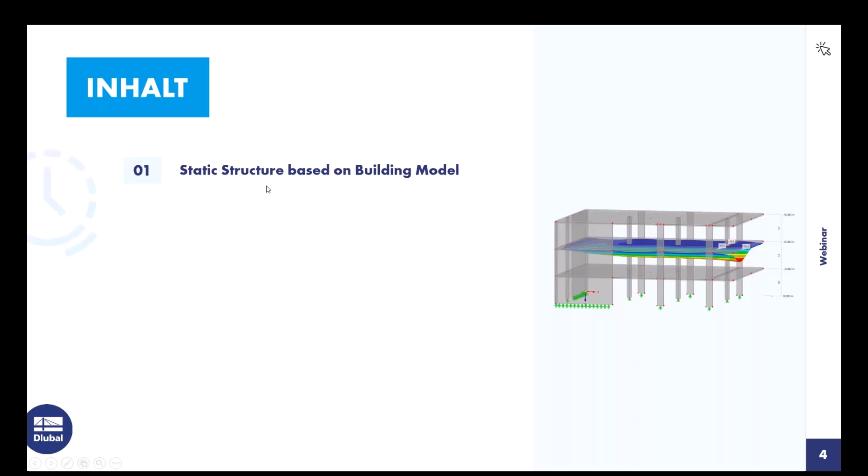You should see my screen now. Yes. So, here's today's content. I will start with the static structure based on the building model.

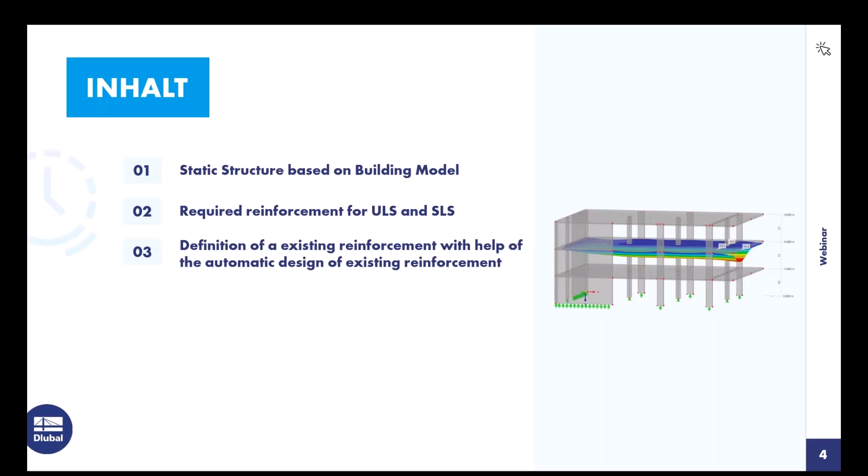So for determining internal forces before the design or before the calculation of the required reinforcement for ultimate limit state and serviceability. Then I will define an existing reinforcement and will adapt this existing reinforcement with the automatic design for the reinforcement. And then I will go to the design checks for ULS, for example punching, and design checks for the serviceability, for example the crack width. And then at the end, I will show the calculation of the deflection in the serviceable state, including creeping and shrinkage. And the last point will be an outlook about upcoming features in the program.

So I will switch to RFEM, to our today's structure. This structure of today's webinar refers a bit to an older RFEM 5 webinar about reinforcing slabs and deflection calculation for slabs. This older webinar was a 2D position. Today I show, or we show, this based on a 3D structure.

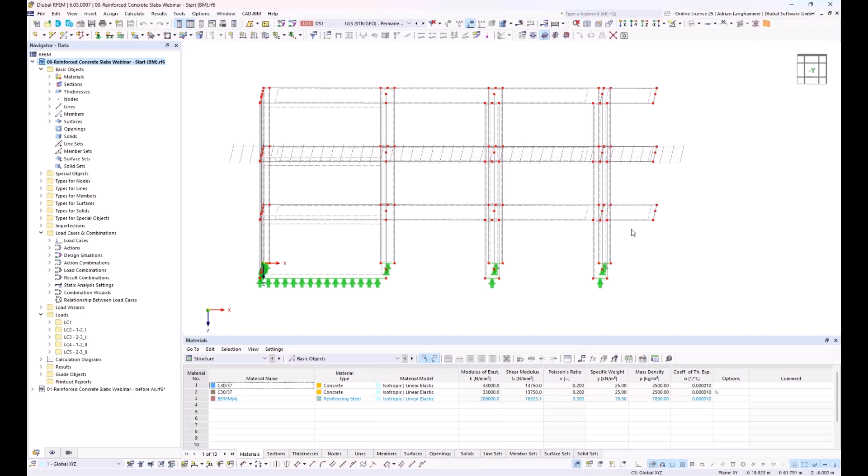This 3D structure has 3 stories. The slabs here in the right area are cantilevered. I have applied some simple but typical loads, a dead load and some live loads here.

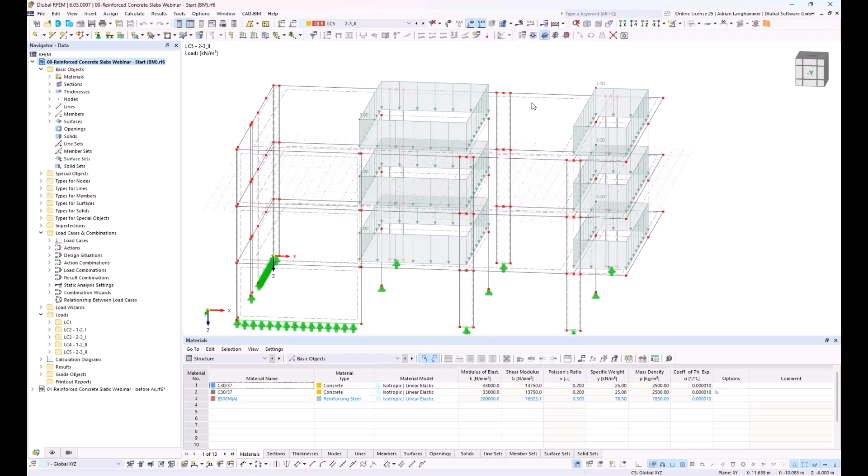In the beginning, I will use the building model add-on to consider the slabs not in the 3D structure, but in some kind of separated 2D structure. Before that, I have to activate the building model add-on. You find it here. And at this point, I will also activate the concrete design, because we will need this add-on afterwards.

With activating the add-ons, the input possibilities in the navigator change. I have here an additional entry called building model. And I will start with the definition for the building model.

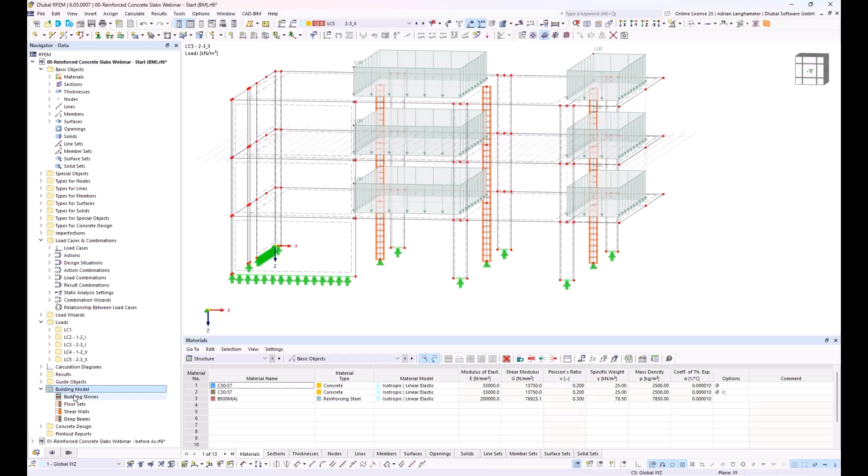So first of all, I have to create building stories. I can do this by hand, or I can use this automatic function where the program automatically recognizes the stories and generates them. This is this button here.

And then I have to choose how I would like to calculate with this building model. There is one option regarding the floor modeling, and there I have to choose rigid diaphragm.

This means that the walls and the columns are connected via rigid diaphragm, and the slabs are considered as some kind of 2D position, or as a 2D structure. It's not exactly a 2D structure, but it behaves like this. For this slab, I have to choose how the attached walls and columns should be considered, so they are considered as nodal supports and line supports. But here there's an option for how this should be done.

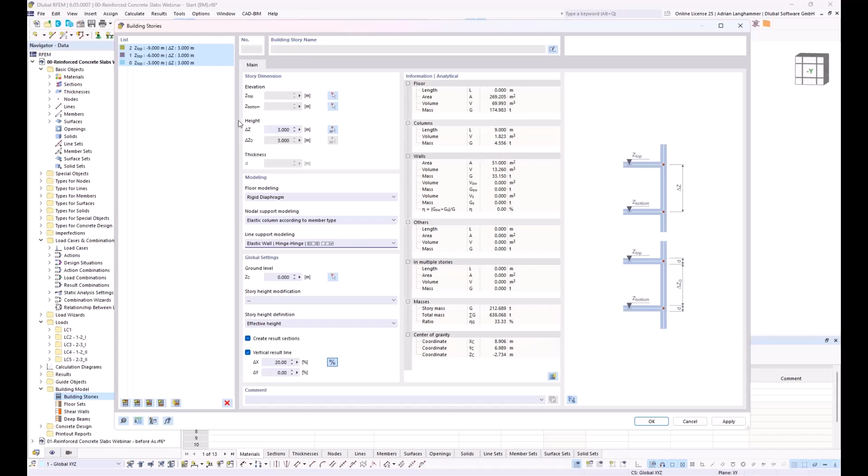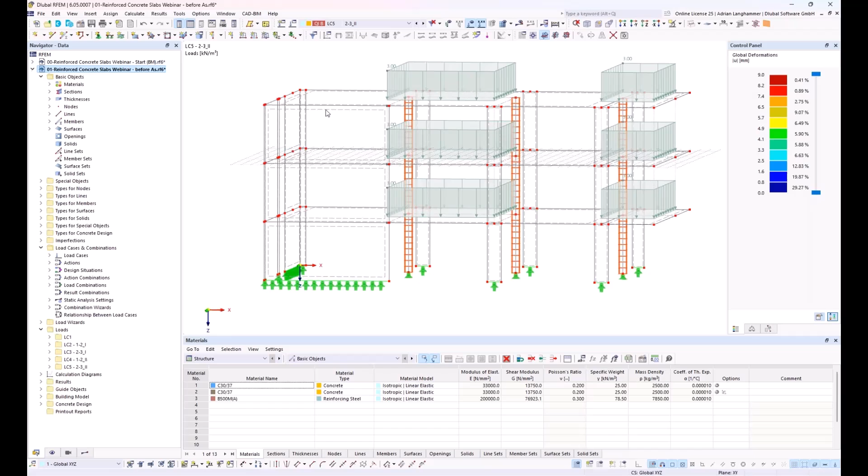So this is my input for the 2D calculation of the slabs. And then I could start to calculate the internal forces. This would need, let's say, half a minute or 1 minute, so I will save this time and switch over to a structure where I've already calculated the internal forces.

And then you get results like, commonly for the statical analysis in RFEM, you get internal forces and deflections. But you have also an option, I can show it, where you could choose what kind of results you want to look at. So there are the common results from the 3D calculation, and there are the results for these separated slabs, which we use for the concrete design.

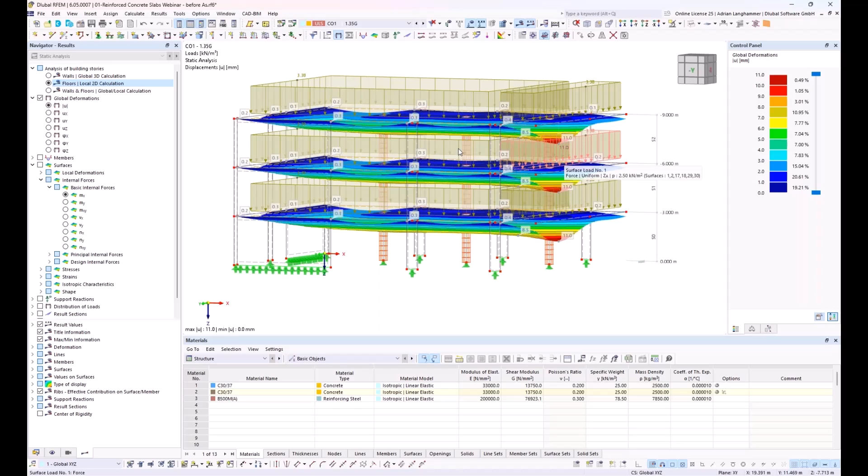I also will show another point. The program, as I mentioned, calculates the walls connected via a rigid diaphragm, and the floors as separate 2D positions, and it also calculates some load transfer based on a submodel which is calculated in the background.

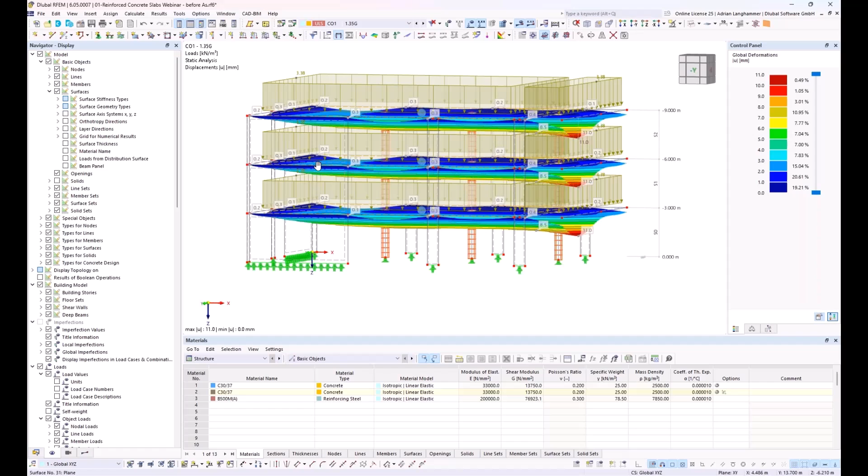And here you could see, if I go to the navigator display and the surfaces, I can have here an option, loads from distribution surface. So now I see the loads as I defined them as surface load, but I can show them also how the program distributes the loads based on the submodel calculation, so I see how this surface load is distributed into the single parts of the structure.

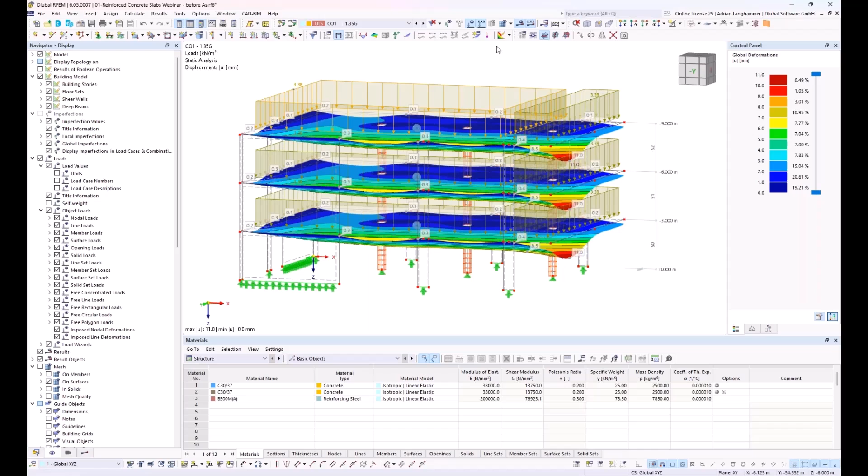So these are our basic results which we use for the concrete design. And now I will start with the concrete design, and in the first step, I would like to calculate the required reinforcement.

I already activated the concrete design add-on. The input for the concrete design you could find in, I would say, 3 main areas. There's an entry here in the navigator, concrete design, and there are, for example, the configurations with all the settings for the design checks, and also there's an entry for types for concrete design with input for the surface reinforcement. And then there's also here in the table this point concrete design, where you could choose which objects you would like to design, and also which loads or design situations you would like to use.

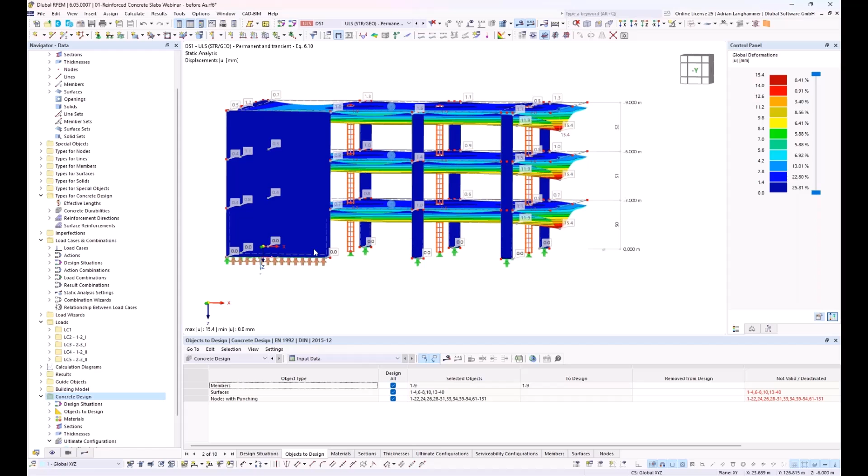So I will start, or I will do the concrete design for this slab in the middle here. So I show only this slab. I will turn off the results and take a look from the top side. In the beginning, I will only design these 2 surfaces, so I will turn off the members and the nodes for punching, and I select here these 2 surfaces. And then I see here that they are at the moment not valid or deactivated, and the reason is that there is some input missing for the surfaces themselves.

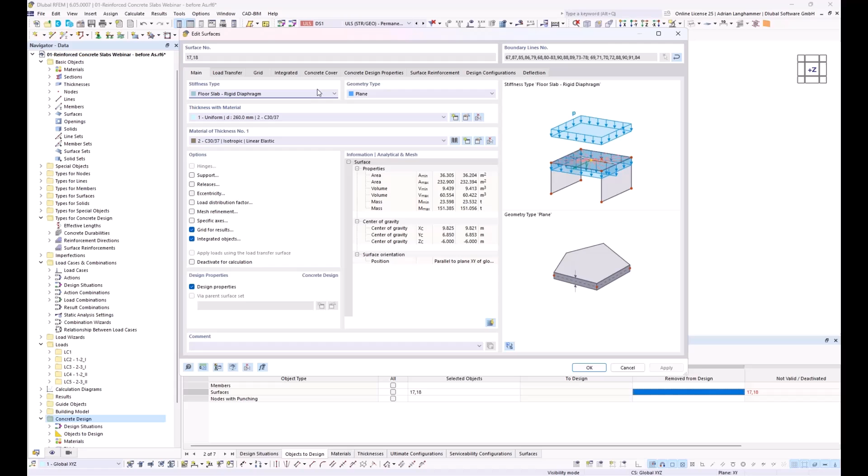So this is the 3rd area for the input. The objects I've selected here for the design, in these objects I have also a concrete related input. So this is here, it begins with the register concrete cover, and then the following registers. So I can do here the input for the concrete cover. I could use it based on the standard automatically, or I could define it user defined. Then I have here the settings regarding reinforcement direction.

By default settings, the first reinforcement direction is always located in the local X direction of the surface. I keep here everything as it is.

And then I go to surface reinforcement, and here I have to do an input. It is necessary to define a surface reinforcement here. It is not necessary to do it absolutely accurate, but the program needs some diameter for the calculation, for example, and it also needs some input for the axis for the reinforcement, because these inputs are influencing the effective depth or the inner lever for the concrete calculation.

So here I start with some basic reinforcement. I define a mesh Q424A at the top and bottom side for these two surfaces, and here I can see what the program then uses as an existing reinforcement. I say OK or apply, both possible.

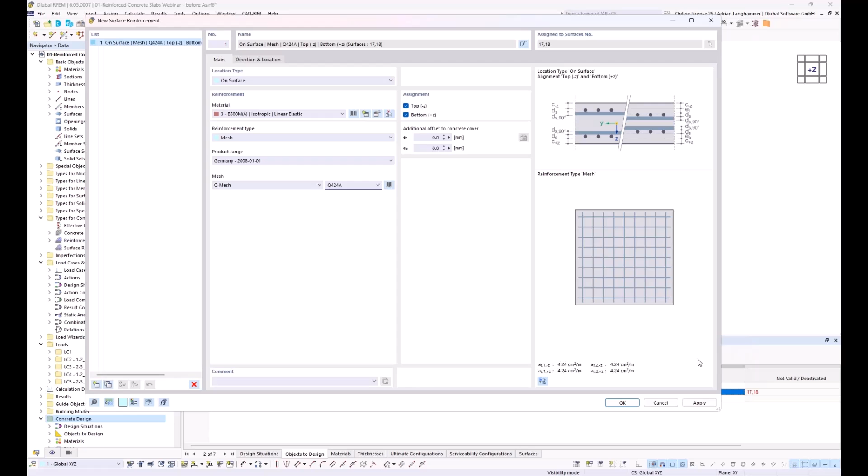In the background, I see that the dialog is a bit delayed, and the surface is switched from not valid to design. So I will close the dialog.

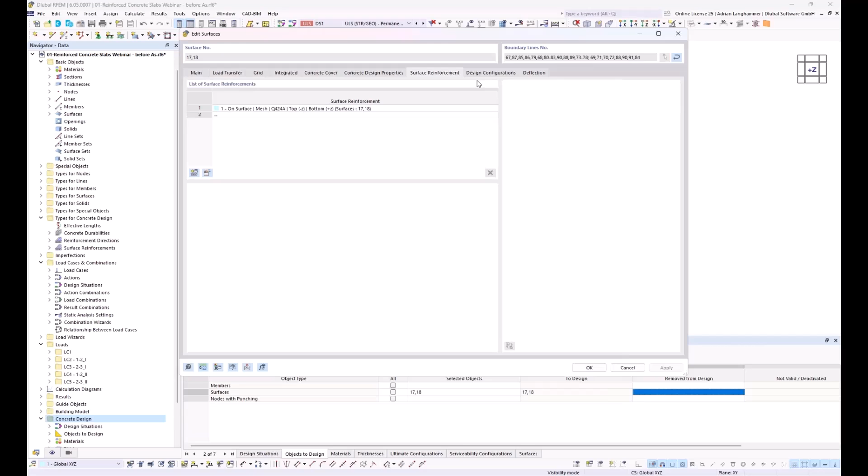Here in the next register, design configurations, I have the related configurations for the design, so the ULS and SLS configuration. Then the last register is about the deflection. This part I will show later.

So I will open the ultimate configuration and the serviceability configuration. First, the ultimate configuration. Here I can do settings regarding the ULS design, for example regarding minimum reinforcement, shear capacity or shear checks, and so on. This is default. These settings are related to slab design, so I keep everything as it is and close it.

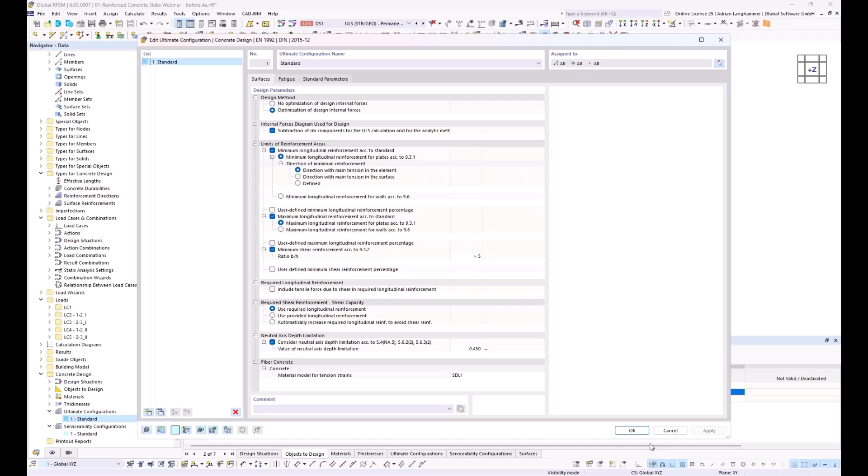Then I will open the serviceability configuration. It's quite similar. I have settings regarding the SLS design checks or for the SLS calculation. Here I would like to turn off the steel stress analysis because it's not necessary in each case.

I also will adapt here the setting for the stress distribution for the effects due to restrain. I will use bending restrain because I know I have here a slab, and the program has some automatism to determine the stress distribution based on the load, but this is not necessary if you know what kind of restrain you would like to consider, and I know that I would like to consider bending restrain here.

And at least I will deactivate the deflection analysis. This is an option I will use later.

Then I have here this option which is activated by default, that the program increases the required reinforcement automatically also for the SLS, and here you have summarized for which design checks this is used. So I keep this option on because this is my first step - I would like to calculate the required reinforcement.

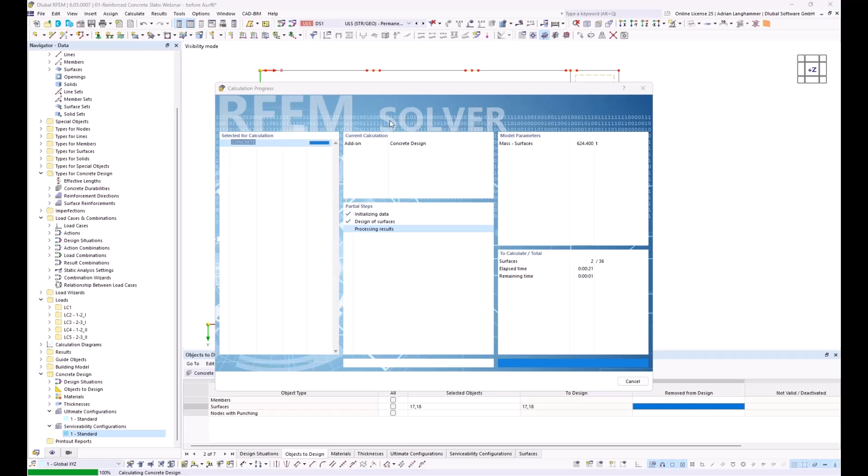And this is one way how you could work with the program. This could be, let's say, a step how you handle your structures by calculating the required reinforcement.

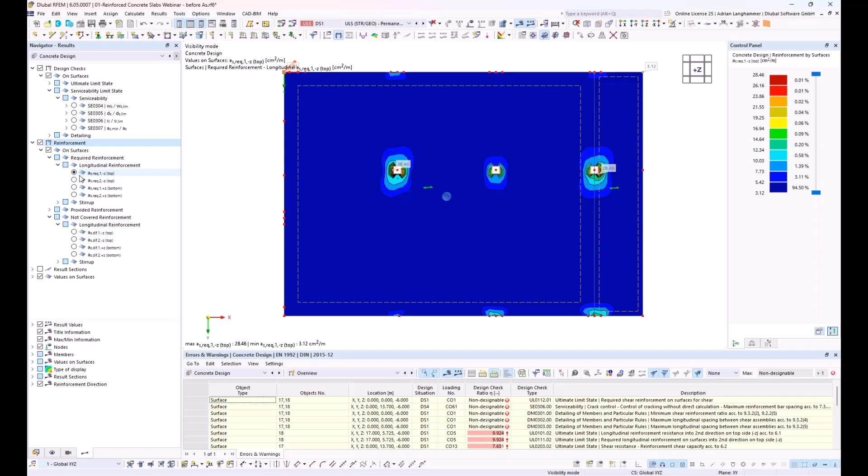When it is calculated, you have here in the result navigator for the concrete design this point, reinforcement, and then you could have a look at the required reinforcement at the top side in the first and second direction, and at the bottom side also in the first and second direction.

At this point, it would be theoretically possible to document the results, and then you have your concrete design. But you could do also a bit more.

A bit more detailed calculation - you could define the existing reinforcement a bit more detailed, especially if you later want to use the deflection calculation.

But first I would switch here from required reinforcement. There's also another option, not covered reinforcement, which shows the difference between the existing reinforcement, which is between the provided reinforcement, which is 4.24 square centimeter, and then I could use here this difference. So I see where this mesh, which I've chosen as basic reinforcement, does not cover the required reinforcement.

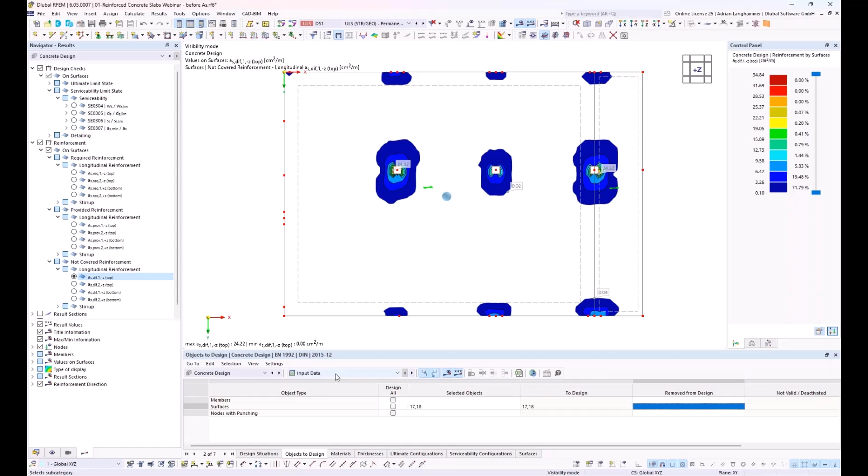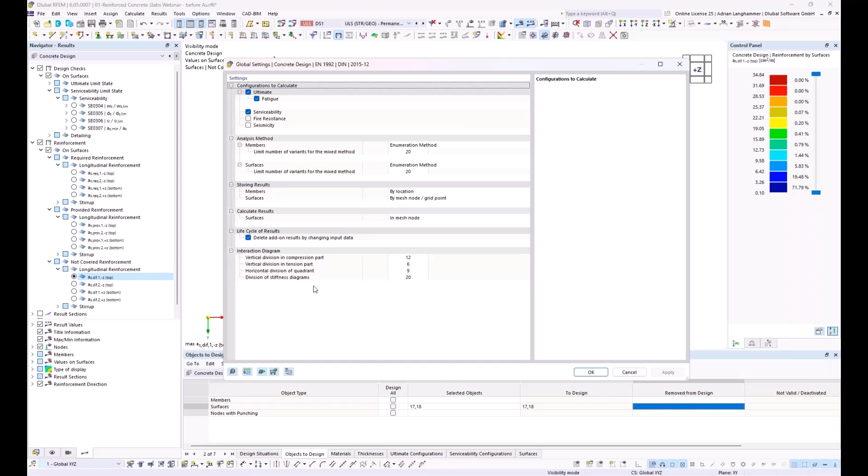But first, I would like to freeze these results because I would like to use them via input. There's an option here in the input data where I could say, if I change something for the input like the reinforcement, the program should not recalculate. It should keep the old results because I could use them via input, and then when the input is done, I could activate this again, and the program recalculates.

So I turn this off, and then I will define the reinforcement, and I will start with the reinforcement above the supports.

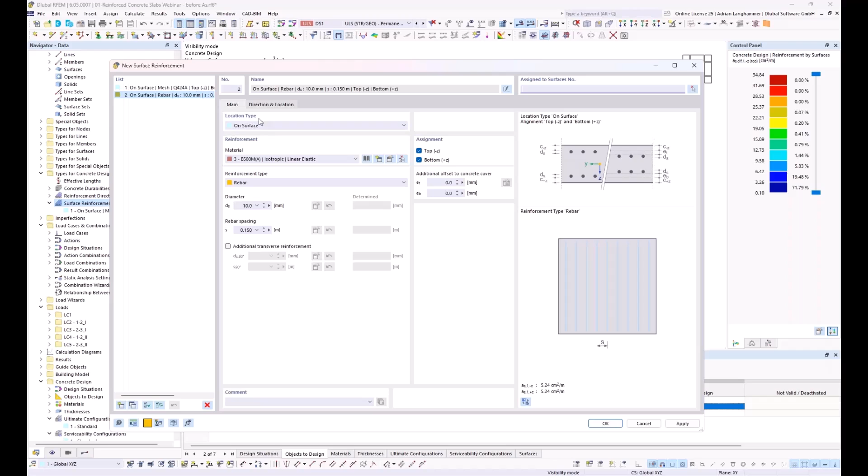I have to go to the navigator, here's surface reinforcement. There's also our existing mesh basic reinforcement. I create a new surface reinforcement, and this time not for the whole surface.

I would like to use a free rectangular reinforcement only at the top side, assigned to these two surfaces, with diameter 20, and also for the transverse reinforcement, diameter 20. And then I would not do the input.

I don't want a direct input of the rebar spacing. I would use the automatic function, the automatic design of the existing reinforcement. If I click auto, the program automatically determines the rebar spacing, so I have to give a minimum and maximum value. I keep the default settings, and for increment I use a larger increment, 5 centimeters, and I do the same for the other direction, and say OK.

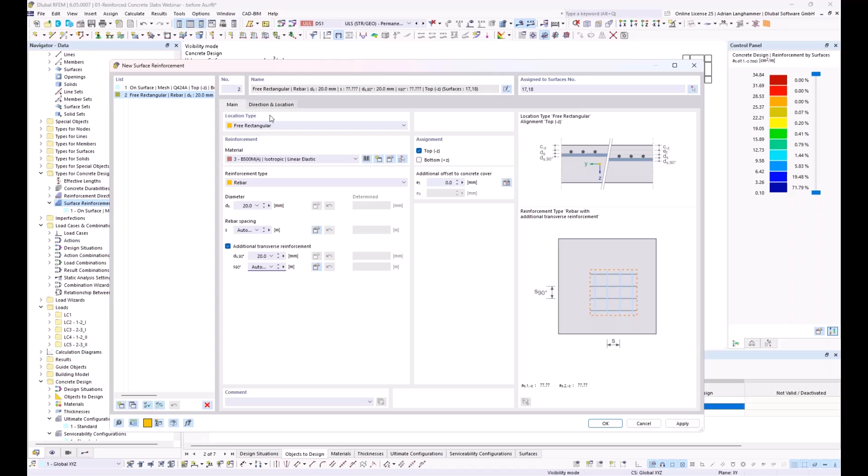So now the program automatically determines the rebar spacing based on the required reinforcement.

I will do the input. I have here the register direction and location. I will do the input based on a center and then side length for A and B. I took a look before about the size of the area, so it's about 2.5 meters. And then I click here on the middle of the support, say apply.

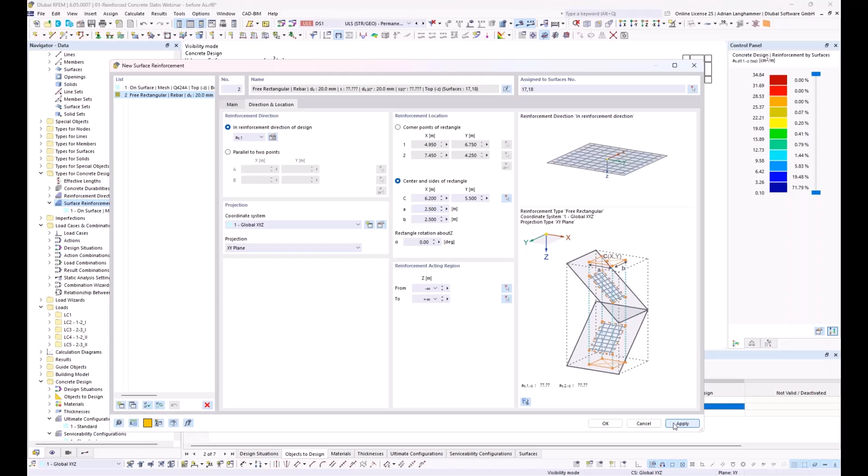And then it should show the reinforcement. I could also, to define the other reinforcement areas, use the copy function. It keeps exactly the same settings, and then I only have to change the location. I can click apply, and again for the other one, apply, and then I have defined the other reinforcement areas very easily.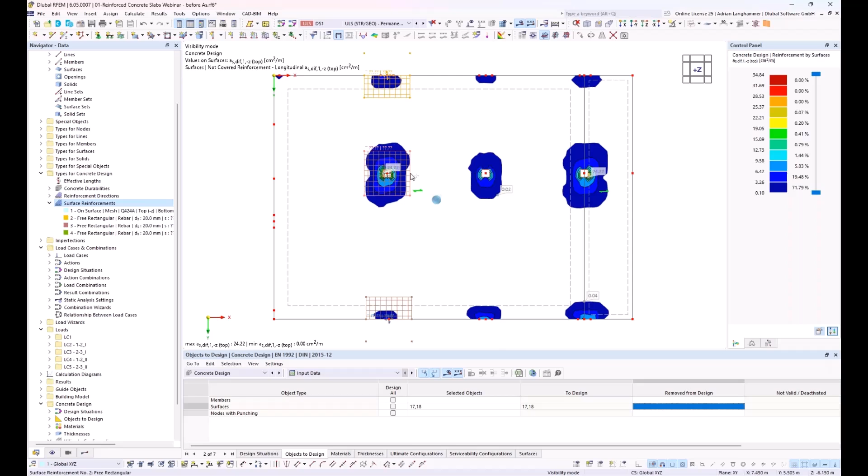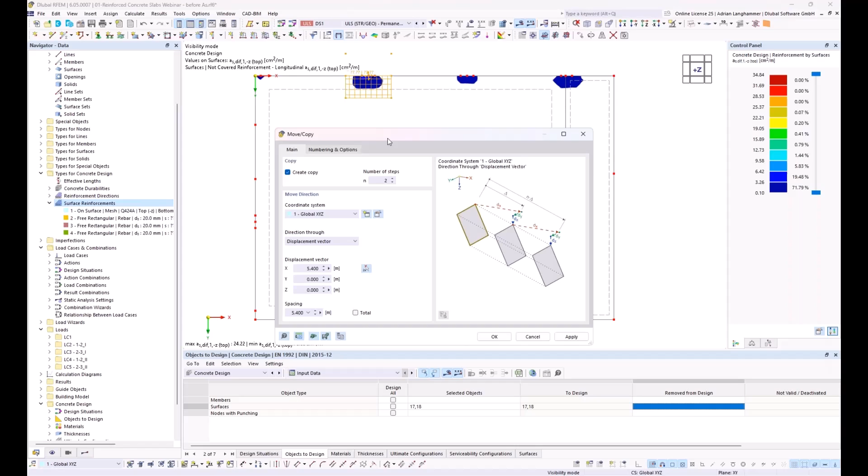There's also an alternative way. The surface reinforcement is like every other object in RFEM, it behaves like a surface or like a free load. I can select the surface reinforcement and use the copy function, say create a copy or create 2 copies, then pick my vector from start to end point and say OK, and the program copies the reinforcement 2 times.

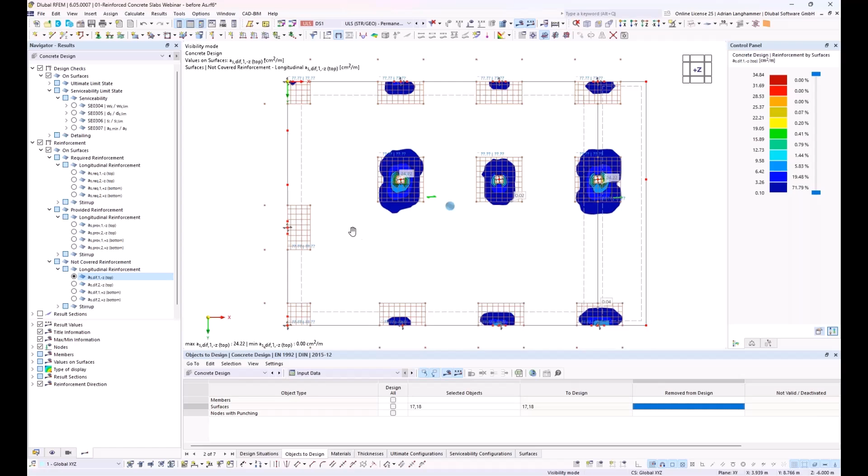I have here in this area also some supports, where there is also some not covered reinforcement in direction 2, and I guess in the upper corner there's also a small area. Here I would also like to use this reinforcement for the support. So I copy it again for this point, this point, and this point, and say OK. Now I have defined reinforcement for all areas where not covered reinforcement is above the support.

I have defined this reinforcement here. It's not necessary to have for each reinforcement area 2 directions. For example, here these 3 upper columns, there is not covered reinforcement in direction 1, but not in direction 2. And also here, there is no required reinforcement in direction 2. I would like to use this and show how you could adapt the reinforcement.

So I could choose these 5 areas of reinforcement, and say I don't want to use the second direction, and say OK. Here it is the same, I forgot this. There's also not a not covered reinforcement in direction 2.

And here for these two, it's vice versa. There is no reinforcement in direction 1, or the not covered reinforcement is 0 in direction 1, but in direction 2 there's some not covered reinforcement. So therefore I could also adapt these two.

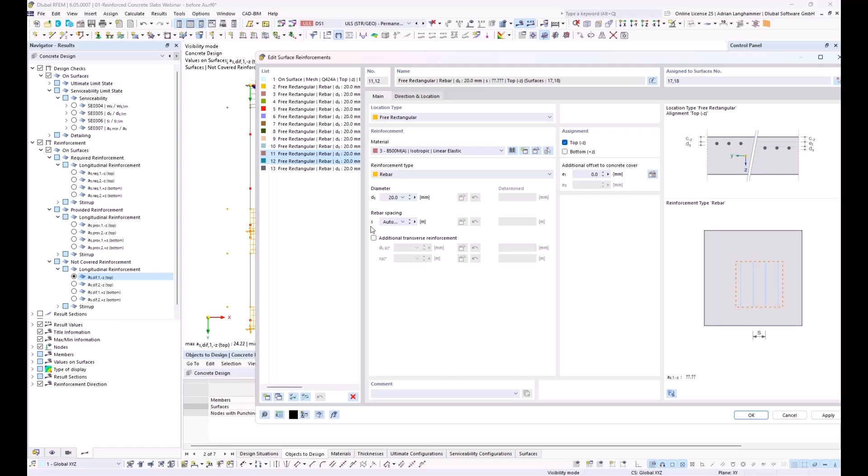It's a little bit different here. I have to switch off also the transverse reinforcement, but I have to say that the first direction is not direction 1, it is direction 2, and say okay. And then I have everything adapted as I would like.

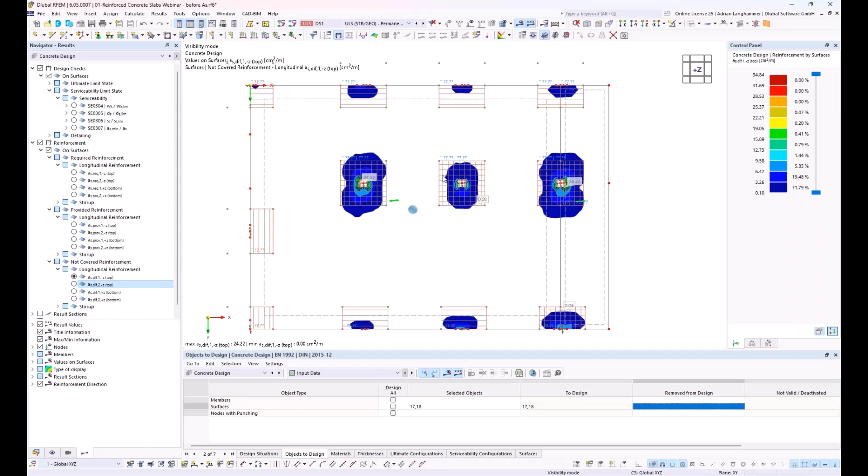There is some reinforcement here in between these supports, so I will create another area at the top side here. I say new surface reinforcement, rectangular, choose these two surfaces, and this time I define the diameter and the distance.

I would like to use diameter 12 at 10 centimeters. Here also for the transverse reinforcement, and I have to check only at the top side.

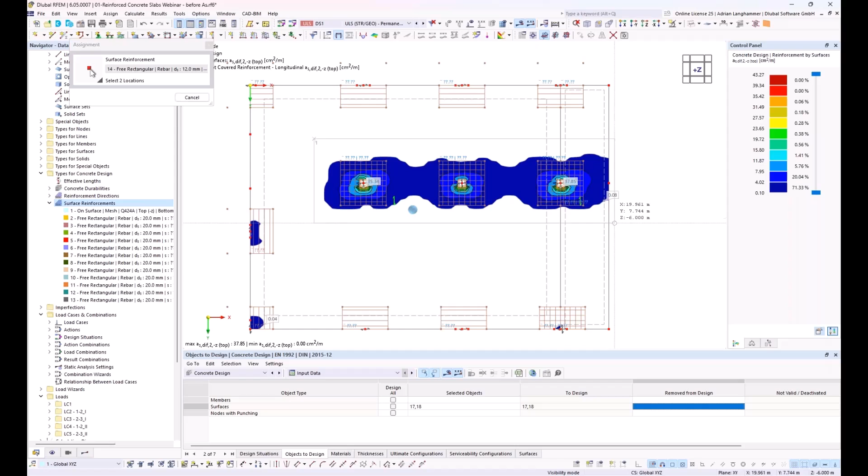And this time I use this definition by corner points. So I have a grid in the background, and I could choose every half a meter. This grid could also be adapted, I use the grid with half a meter, so I can define it here graphically like this, for example, and say okay.

And then I have a, it looks, moment, I did some mistake here. It's always good, you could always use the graphic to check if the input was correct.

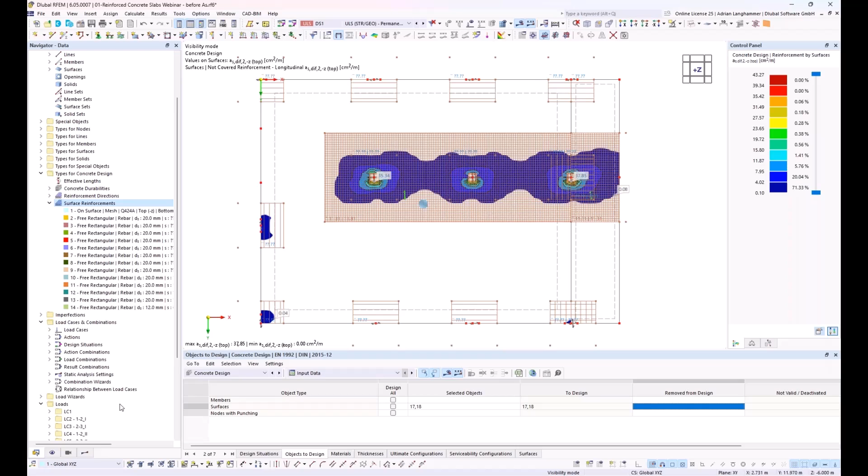And then I have to define also two reinforcement areas for the bottom side. There's an area here where a not covered reinforcement occurs, and then also here in this area in direction 2 mainly, also a small reinforcement in direction 1. So I define for these areas also an existing reinforcement.

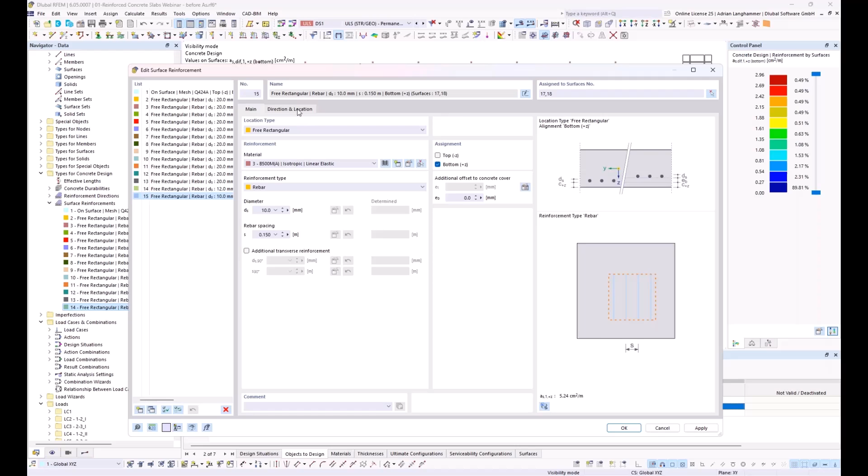I use the copy function again and copy my last reinforcement and switch to bottom. And then for the first one, I would like to use diameter 10 every 15 centimeter. And in this area, let's say from here to here, and say apply. I could check it, yeah.

And then another area, or another reinforcement at the bottom side here. In first direction, I would use 10 at 30 centimeter, and in the second 10 at 10 centimeter, like this. And I use it for this whole area here, and say okay. And then I'm ready with my input.

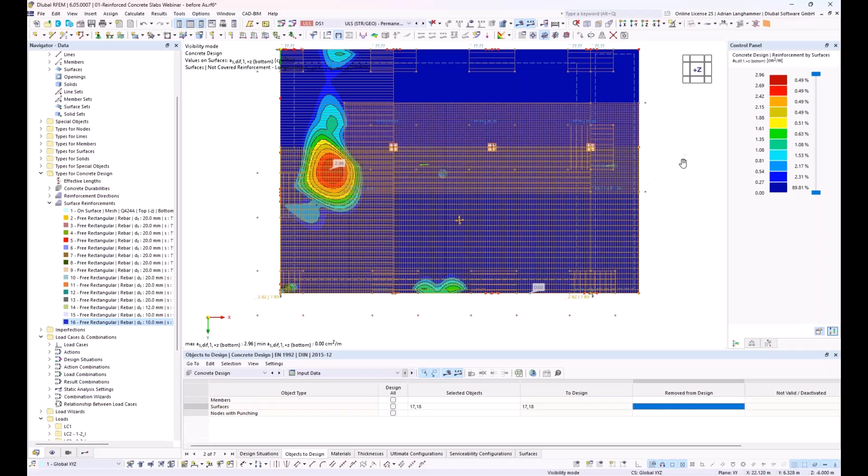So I could now start the calculation again, and with starting the calculation, the program will automatically adapt the reinforcement. So I go to the input data again, and I switch off this option. Say okay, the results are deleted. I could calculate again, and now I see that there's changed a little bit for the calculation. I have now two concrete entries.

The first calculation is the required reinforcement. So with changing the reinforcement, there could be also changes regarding the inner lever arm or the effective depth, depending on the defined reinforcement. And the second calculation is the automatic design of the existing reinforcement.

So in this step, the program automatically decreases the rebar distance till this point that the required reinforcement is covered. There could be also the case that there is no solution, but then you should see the minimum distance. So in such case, you maybe have to adapt then the diameter, for example.

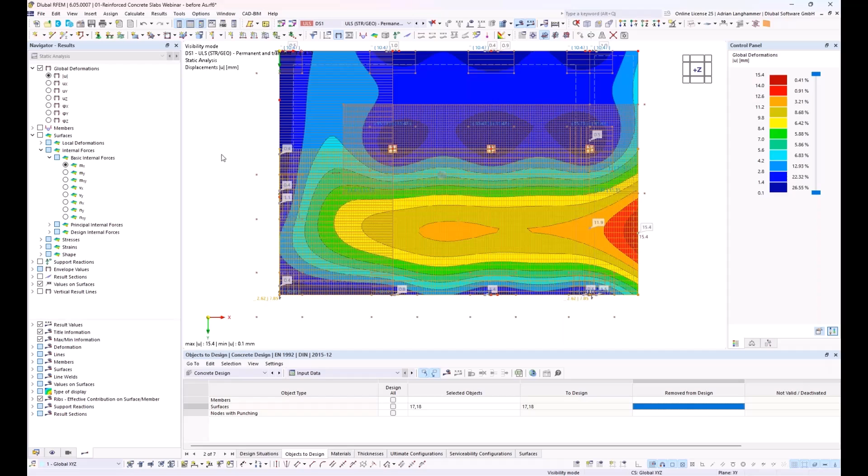So now the calculation is done, and I could have a look at the results. So maybe I start with the top side with the not covered reinforcement. So now the not covered reinforcement is 0, and also in the second direction is 0. So in these areas where I used this automatic reinforcement,

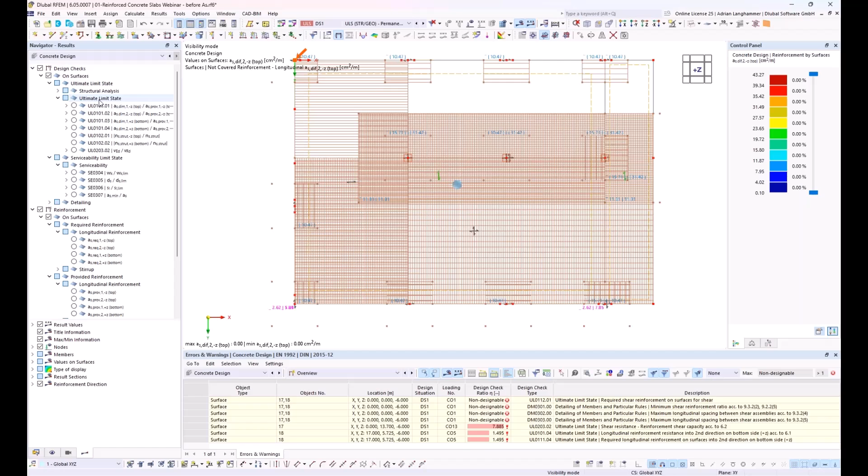everything is covered. I could also have a look now at the design checks, for example, at the ultimate limit state for the top side. Maybe I can— does not look that good. If I have this reinforcement turned on, I can switch it off here if I switch off types for concrete design.

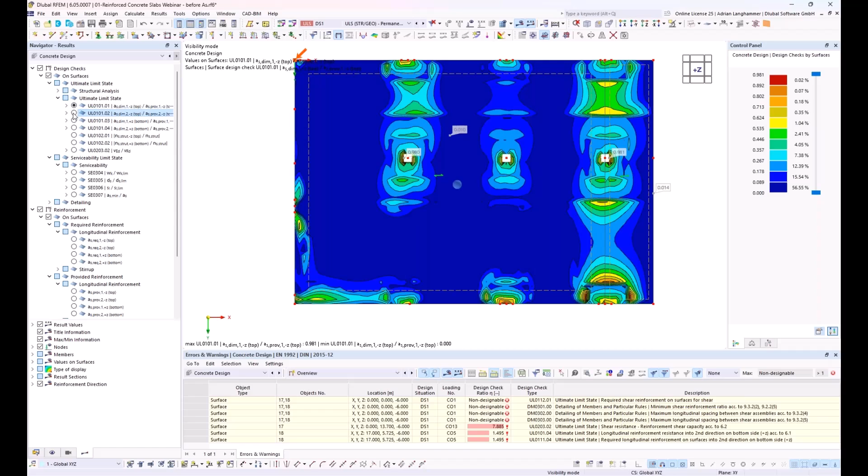So I see here the design check for the ULS. Everything is below 1, so everything is fulfilled at the top side here, both directions.

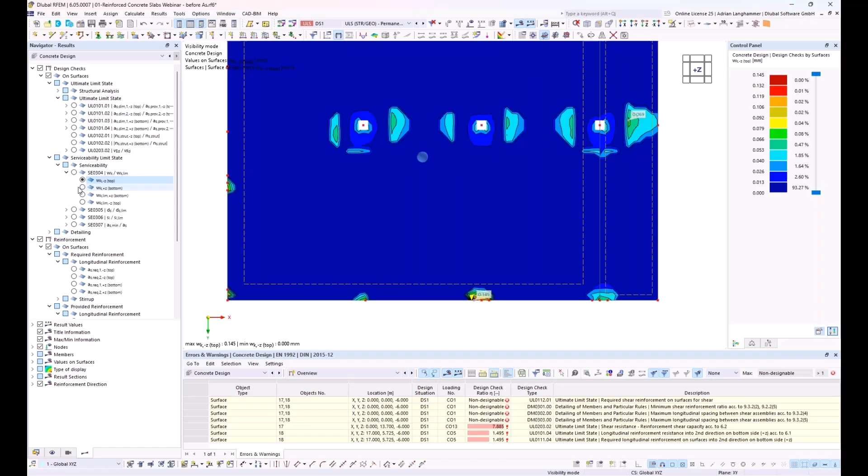I could also have a look at the serviceability, at the crack width design check, for example. I could here have a look at the ratio. The ratio is smaller than 1. For the top and bottom side, I could have a look directly at the crack width. So here I see the crack width value in millimeter here. At the top side, the resulting crack width, and also at the bottom side.

So this should show the possibilities I have here with this automatic reinforcement. And if I say okay, the program determined this distance, I can see it here, the value which was calculated. The program calculated this value, and I would like to use it as an input now. From now on, I could select all these.

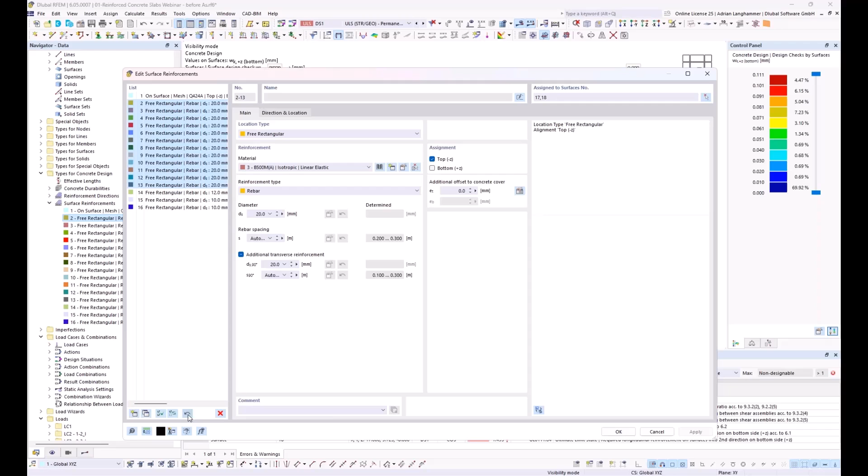I could do it for each reinforcement separately by clicking these arrows, but I could also select all these reinforcement areas where I use this automatic function, and say with this function it should use the determined value for the rebar spacing in the input, and then I could say okay. And from now on, it does not need to recalculate the automatic function in the next calculation or for following calculations.

So this is ready. The definition of the existing reinforcement is ready. Now, as a last step, I would like to do the deflection calculation and also the punching design.

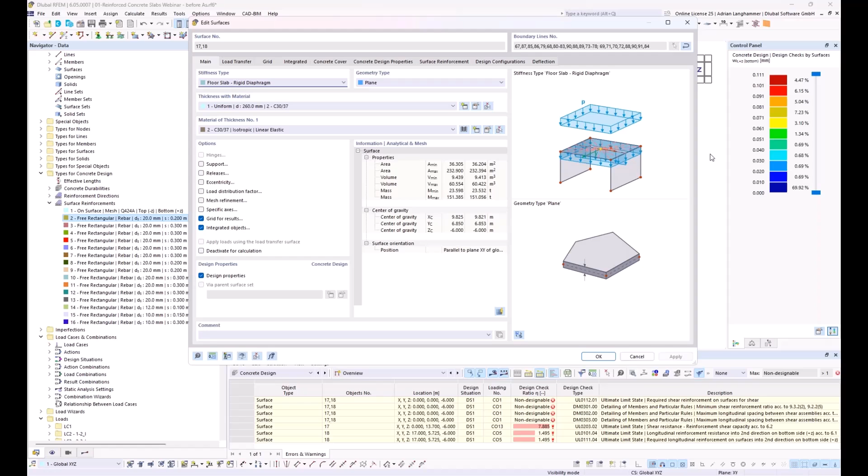I will check at the beginning the input for the deflection calculation. There's—I have to do it separately, one moment. There's an input here for this surface. Regarding the deflection, I could here select the surface type.

This surface is double supported, and I have here a reference length of 8.2 meter, which is the distance between the corner here at the edge and here the column here at the edge and the column here in the middle.

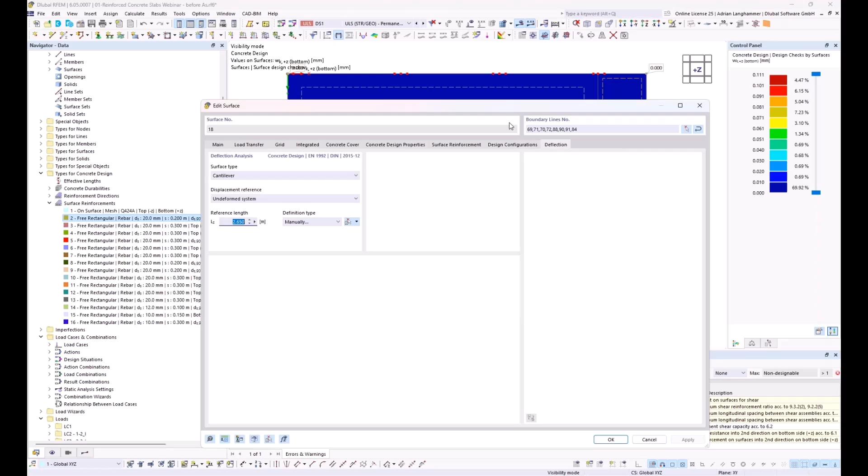And then I have this value also for this canter, for this balcony here, for this cantilevered area, and then I have surface type cantilever and reference length 2.65, which is the distance here.

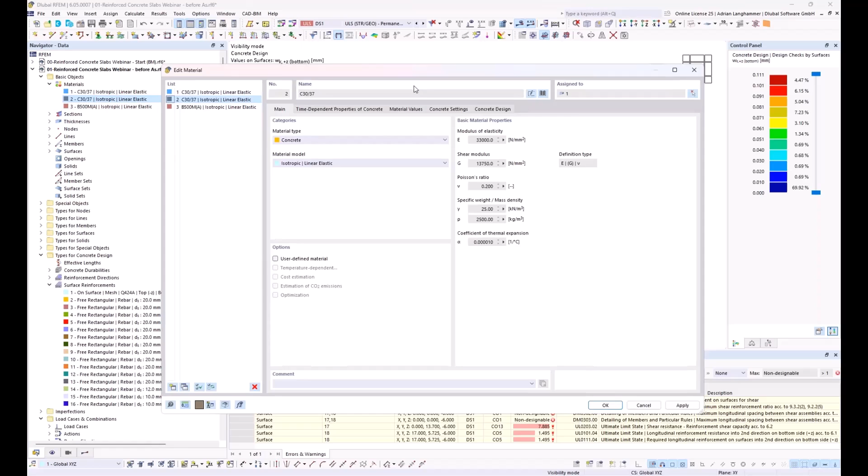I also have to activate or check if the creeping and shrinkage is activated. This is a setting or an option which I find in the material, it's a material related property. So if I open the material here, I have an additional register, time-dependent properties of concrete.

And here I could activate creep and shrinkage, which is used then for the deflection calculation. Here I also see the input for the creeping and shrinkage. This is regarding the calculation I showed today. This creep coefficient diagram is for visualization, based on one thickness.

So creeping and shrinkage is activated. The reference length for the limit value for the deflection is defined, and then I could check the serviceability configuration.

I can now activate the limitation of deflection or the deflection analysis. Here I see the different limit values based on the type of the support of the surface, or if it is a cantilever or if it is both side supported surface.

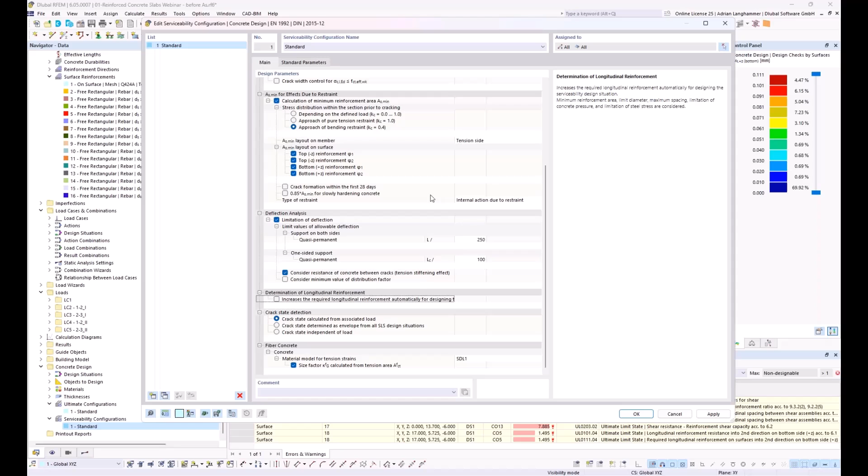It uses different limit values, and then I will in this step also deactivate the determination of the longitudinal reinforcement, again because we have now defined our existing reinforcement. I don't have to use this calculation again, so this saves a little bit calculation time.

And I say okay. Of course, the results have to be deleted, but before I recalculate, I also would like to activate some nodes for the punching. So here, let's say these 3 nodes or 3 points at the columns should be used for punching.

Punching design is also like surface design. You have the object with the input, which is for punching the node. If I click on the node, here you find that punching design is performed, and then you have a related ultimate configuration. I can have a look again at the ultimate configuration.

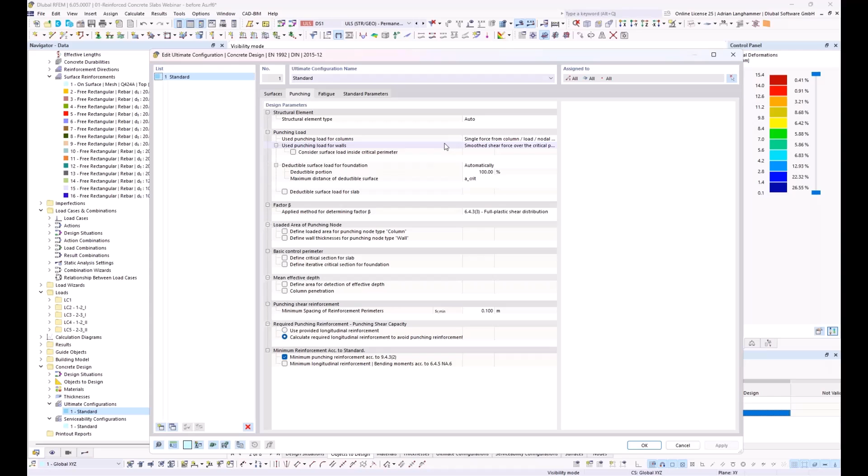And with selecting some nodes for the design here, I get this additional register for punching, and here you could find every single option for the design, or how this punching load should be determined. There are a lot of different settings.

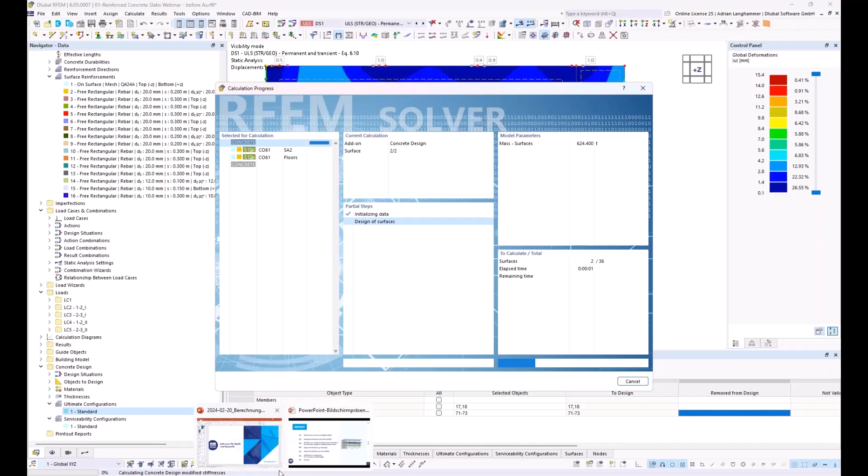I would keep everything as it is here. I would like to use the default settings, and then I recalculate again. But I use this calculation time and switch back, and will do a short explanation regarding the deflection calculation we use here for our concrete design.

This is the deflection calculation according to Eurocode 2, chapter 7.4.3, and this is based on a distribution coefficient zeta. And here's explained how the calculation would work without tension stiffening.

This would mean the deflection is based on the consideration of a cracked state. So the program calculates a stiffness for uncracked state, which is this function here, and cracked state. So we have a stiffness for uncracked state and a stiffness for cracked, or let's say fully cracked state here. And depending on if the element cracks or not, it uses the value for the uncracked or cracked stiffness.

The stiffness itself depends on different parameters like existing reinforcement. This is also the reason why I did some more accurate input for the existing reinforcement. It depends also on the plate thickness, also on the height of the compression zone, material parameter, and of course also creeping and shrinkage.

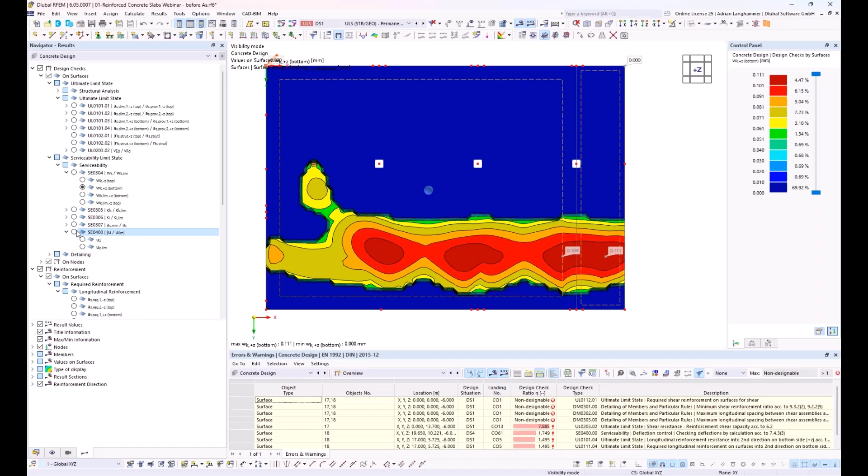So now the calculation is finished, and I have here for the design checks, an additional entry for the deflection calculation. So I could have a look at the ratio. Then I see the ratio for the deflection calculation, but I could also have a look at the deflection value itself.

And here it says I have 4.6 centimeter deflection here, which would mean that the deflection would be not okay for this situation. It would be a bit too large. So there are different ways how to handle it.

One possibility would be to increase the thickness of the slab. Maybe there's also an option to reduce some weight in this area. Of course, the longitudinal reinforcement could also be increased, or I would consider a hock for the formwork here.

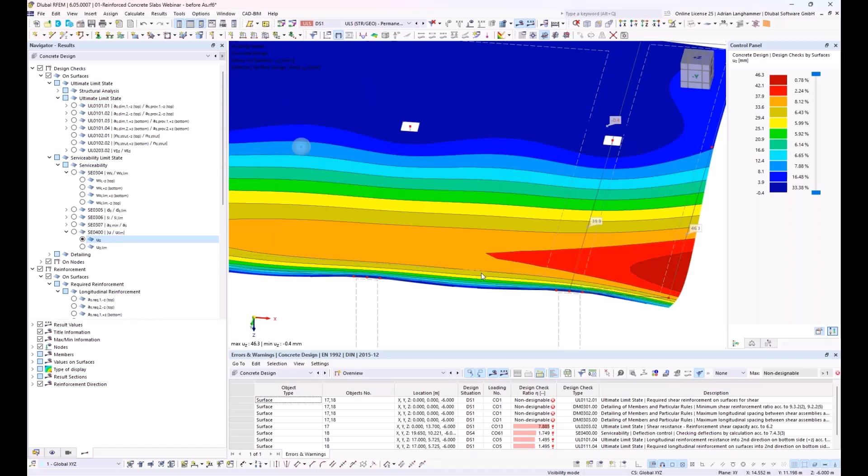I also could have a look and compare the deflection a bit. Here I have the deflection for the concrete design. I could also look again at the uncracked state value for the deflection. If I switch back to statical analysis, quasi-permanent load, here I have the 9 millimeter, and compared to that I have the 46 millimeter, which is from the factor.

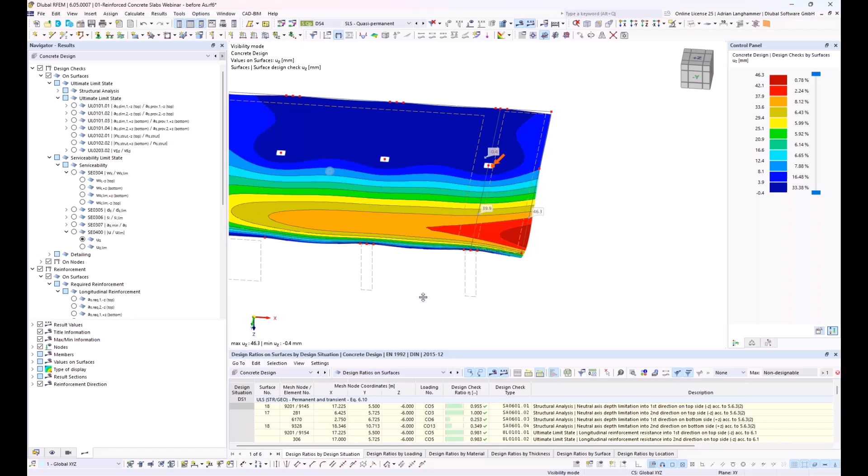It seems plausible. I could also take a closer look at the deflection results in the design check. So if I take a look at this point at the deflection calculation, I can see the detailed calculation with all the intermediate values. So the whole program is not a black box - you see every calculation step here.

Also for the deflection calculation, I could look at the calculation in uncracked state, in cracked state, all the stiffness values. If you would like a closer look, showing these design check details is possible for all design checks calculated in the program - not only for deflection, but also for crack width, the ULS calculation, the punching design, and so on.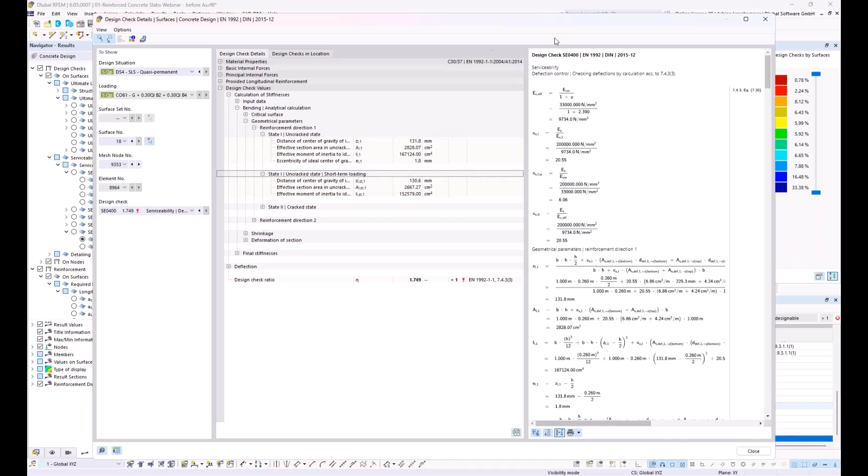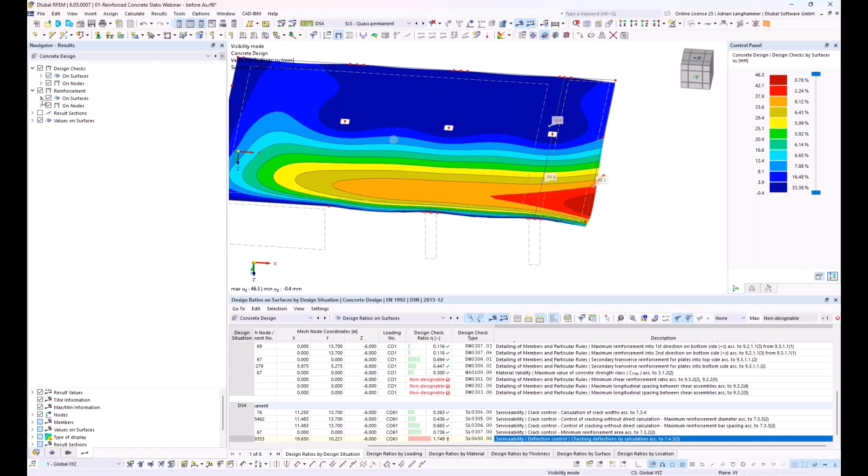In the last point, I would like to have a look at the punching design. So if I use the punching design here, I have results on nodes where I could, for example, look at the required reinforcement for a node, like here, required reinforcement at the top side. The program with default settings always tries to increase the longitudinal reinforcement to cover the punching, but I could also use the existing longitudinal reinforcement, and if that is not enough, the program will calculate the required reinforcement for punching.

Maybe to show a small look into the future and the upcoming features - one next step which will be released in the program will be punching reinforcement. I have prepared a small example of how it will look in the future. So if I have here, for example, a required reinforcement at one point...

I could take a look at the required reinforcement at this node, and then I see how much reinforcement is required at which distance. I could also look at the details and, for example, see how many link legs I would need. So here, for example, it is 11, so to cover it I probably need 12.

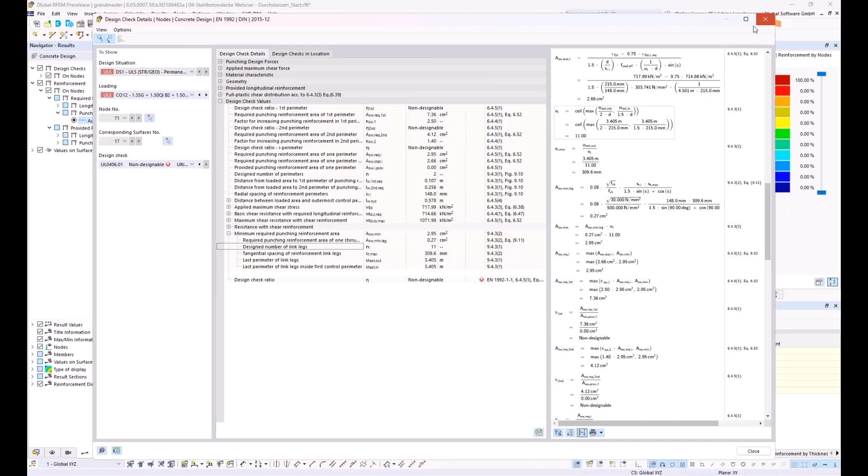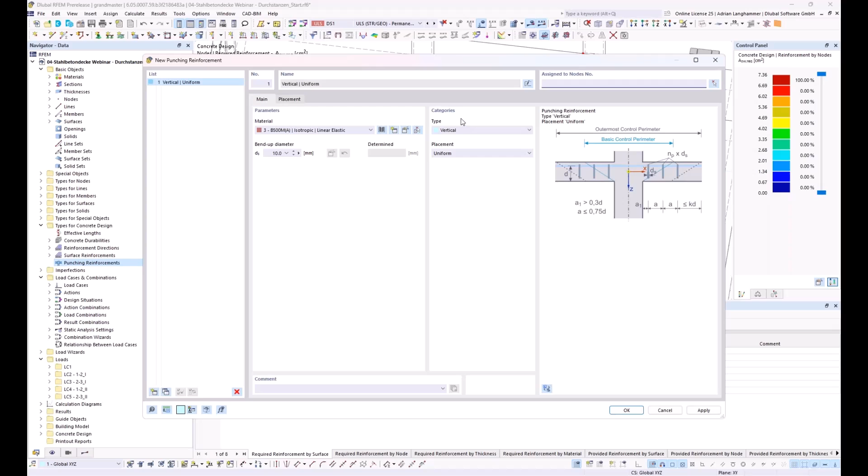And then I could define a punching reinforcement. So here, this is in the types for concrete design. There will be an additional point in the future, in the upcoming versions, for punching reinforcement, and I could create a new punching reinforcement. I keep everything as it is, but I have to choose the node where the punching reinforcement should be applied, then use the number of perimeters and number of legs in each perimeter. You see here that there will also be an automatic function in the future.

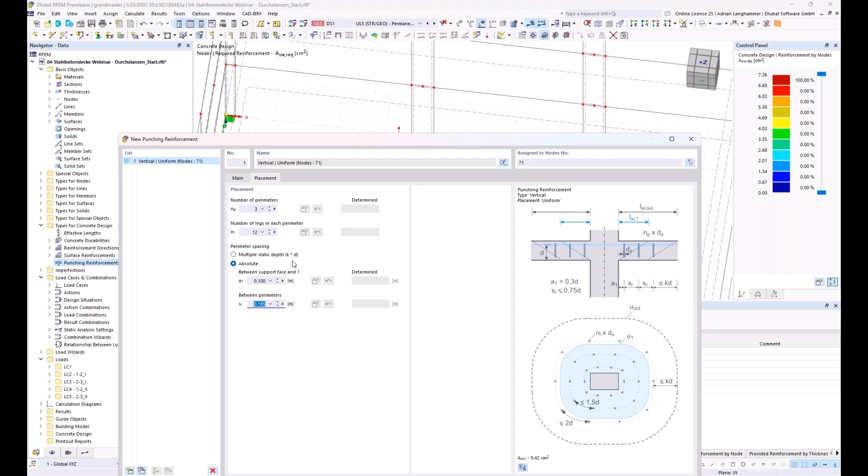Now for this example, I will do it manually. So number of perimeters, let's say 3, and number of legs in the perimeter, 12. Then the distance between the support face and 1 should be smaller than 0.107, so I would say 0.1 should work. And then the difference to the next is something about 11 centimeters.

And then I say okay, of course it needs to recalculate, and then I see the reinforcement here. I could recalculate the results, and now I see that the design ratio is fulfilled - so everything works here for the punching design with this defined punching reinforcement. Yeah, this should just be a small look into the future at the end.

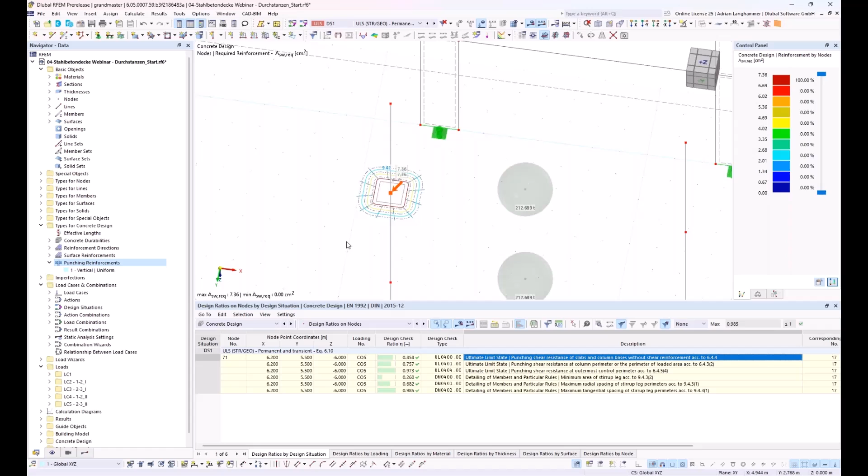And with this point, I will hand over to Alexander, and he will give you an overview about upcoming features.

Thank you, Adrian, for the presentation. Before I start with an overview of the coming features, I want to address some questions that were asked during the webinar, which I think would be interesting for everyone.

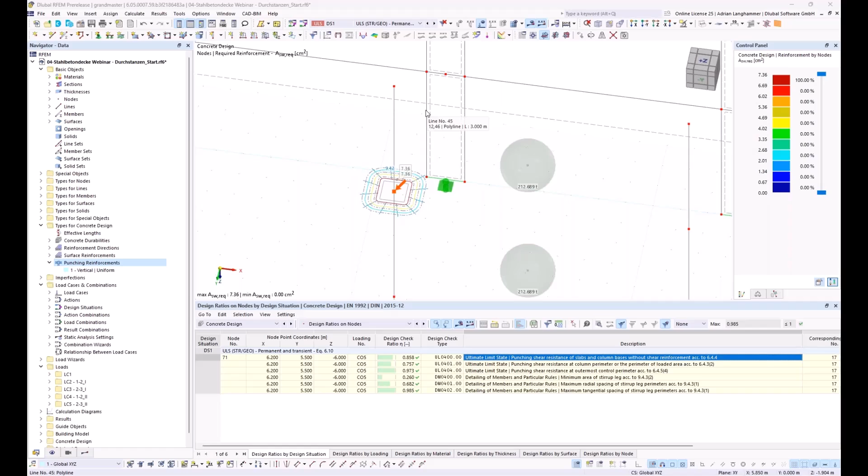The first question was about the deflection calculation. Is it possible to consider the damage of the crack formation from a real design situation and calculate the deflection for the quasi-permanent loads with that stiffness? Maybe you can show it in the program. I guess it's probably related to this option: if you would like to calculate the cracked state not from the quasi-permanent load but from the real load situation.

In RFEM 6, it is now possible to have this cracked state detection. As default, the program calculates with the quasi-permanent load, determines the cracked state, and then calculates the deflection. But it is also possible to calculate the cracked state from the envelope of all serviceability design situations.

So for the characteristic combination, the program checks in the beginning if an element cracks with the characteristic combination, and then it calculates the distribution coefficient zeta based on this load. The deflection itself is then calculated with the quasi-permanent load. So yes, this should be possible.

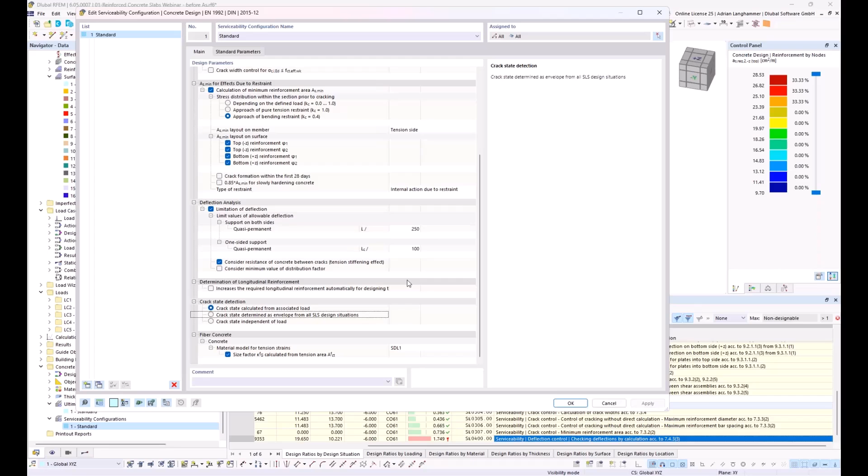One question more I would like to highlight: you designed one slab in the building, and the question was how to define the surface reinforcement for the remaining slabs of the building. What is the recommended approach here?

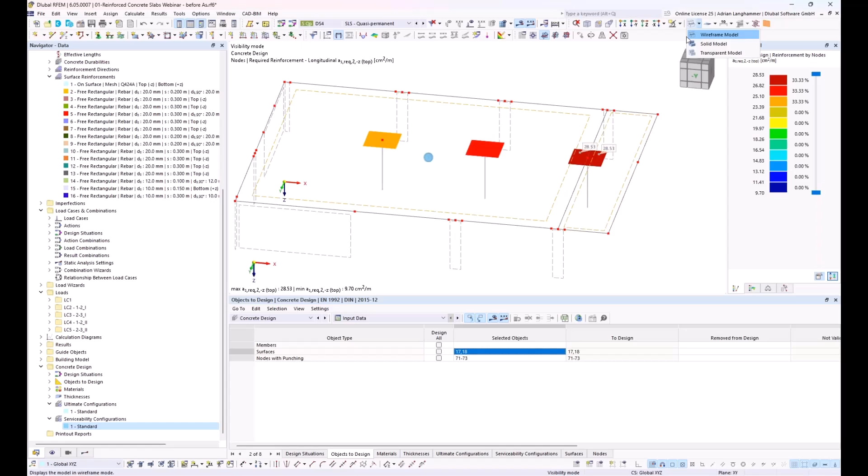There are different possibilities. One easy way is I turn on the reinforcement again. One possibility acts like some kind of projection. If you would like to use the same reinforcement for the other slabs, you could select these slabs and just assign the reinforcement also to the other slabs, like this. Of course, the results have to be deleted then.

Oh no, they don't have to be deleted. They have to be deleted only when I also choose the surfaces for the design. So this is one possibility.

Another possibility would be to copy all this surface reinforcement and then assign it to the other slabs. In case you do not have exactly the same reinforcement but something similar, you could copy the reinforcement and then adapt it for the other slab. So this is possible and should be quite easy.

Okay, super. Thank you for the explanation.

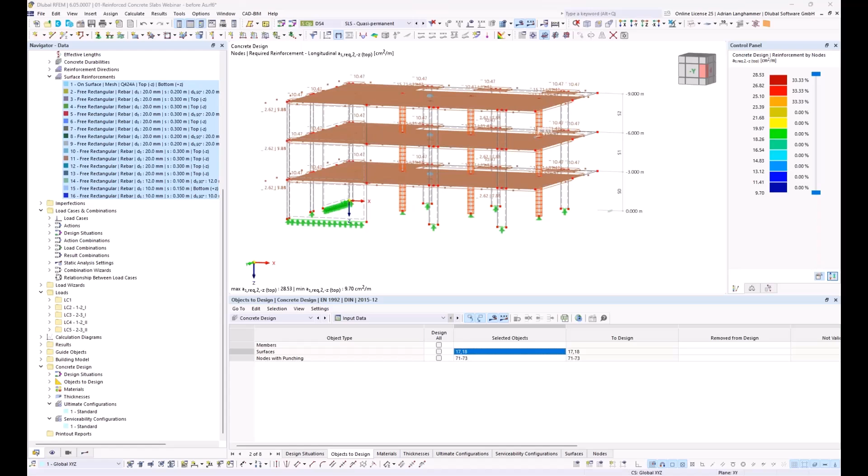I would like now to come to an overview of our current development projects and take the chance to give you an outlook to our upcoming new features for the reinforced concrete design. For this, I will switch the monitor. I hope now the right monitor is shown to you.

Yes, okay. So the first feature which will come really soon is the definition of the punching reinforcement. It was already presented by Adrian, so I will go directly to our next feature.

The automatic layout of the provided member reinforcement. With this feature, it will be possible to determine the number or the diameters of the rebars in a member automatically by the software. Generally, it will work in the same way as the surface reinforcement layout shown today, and will be a really nice feature.

The next feature I want to present is a very big development in our company: the physical and geometrically nonlinear analysis of reinforced concrete. We have a completely new concept here, and with this new concept, the calculation is directly implemented in the finite element calculation of RFEM. It is possible to use the nonlinearity of the reinforced concrete together with other nonlinear materials, or for example other add-ons like the nonlinear pushover analysis and so on.

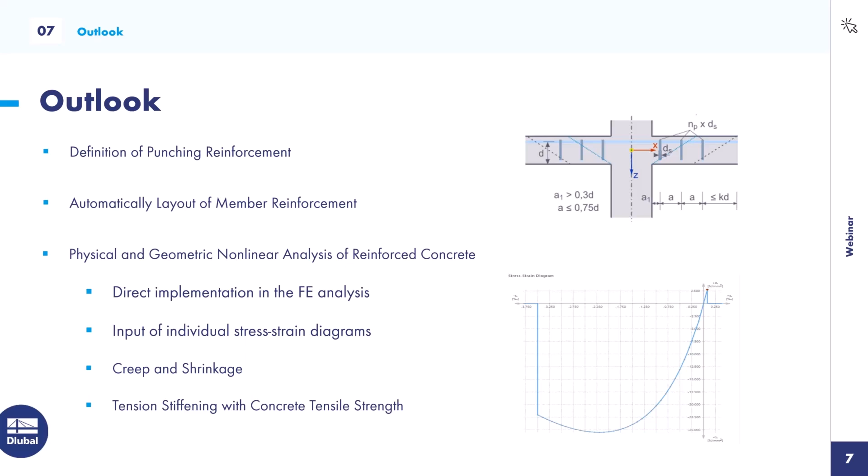The next topic in our development is the design of shear walls and deep beams, which will be automatically generated in the add-on building model. Adrian already showed the building model and how it works with the load transfer. With this building model, it will also be possible to automatically generate shear walls and deep beams as a design object, and these objects will then be directly designable in the add-on concrete. It will be a simplification for you.

Further, our team is working on the seismic design according to Eurocode 8. Last year we already released the design of reinforced frames, meaning the ductility, the constructive rules, and the capacity checks like strong column, weak beam are already available in RFEM 6. Now we are working on the required reinforcement for the rules of the capacity design.

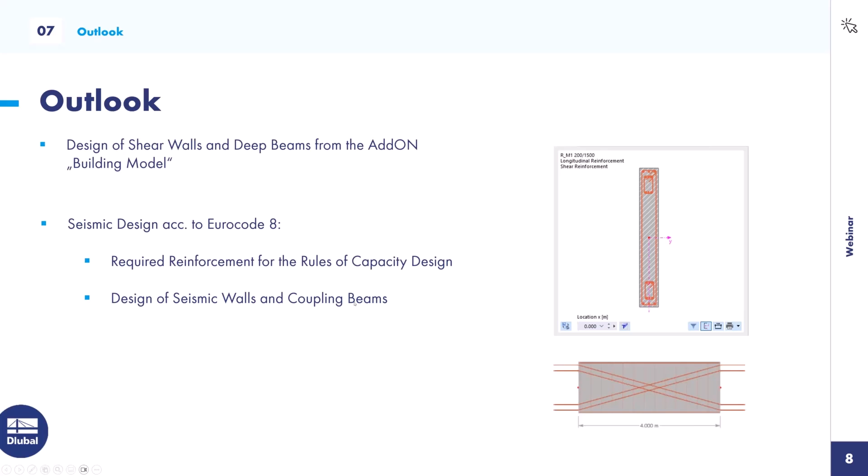The next project, which will also be released in 2024, is the fire design. For the fire design, we already released last year, at the end of last year, the design with the table approach according to chapter 5 from Eurocode 2 for columns and beams. The design checks for walls and slabs will really be released soon; it is in the final testing state. And currently we are developing the fire design according to the zone method from Eurocode 2.

Finally, I want to mention one of our high priority development projects, the new add-on concrete foundations. With this add-on, it will be possible to design single foundations. Currently, the geotechnical design checks according to Eurocode 7 are almost implemented, and we are now working on the calculation of the required reinforcement according to Eurocode 2, and also on the graphical user interface. This add-on will also be available, or released, this year for you.